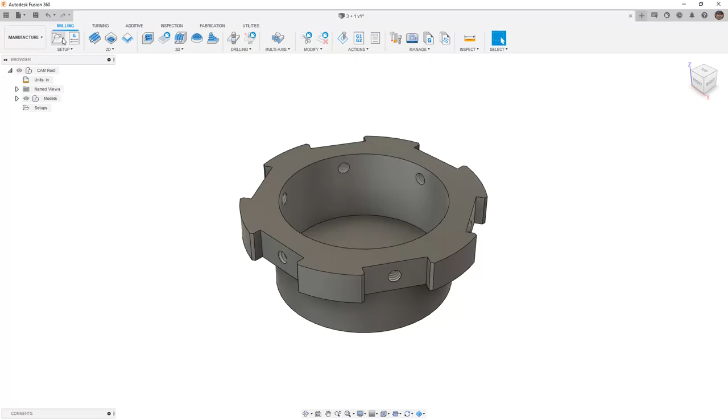For this part, we want to expand our models and expand the bodies folder, and note that we have a stock body. So for our stock, we're going to set this to from solid and use our stock body. For the coordinate system, it's important to understand whenever we're adding a fourth axis or an A-axis to a machine, this is going to be rotating about X. If you have a different setup or a different orientation on your machine, then you need to make sure that it's set up based on that. But for our example, we're going to assume that our A-axis is rotating about X.

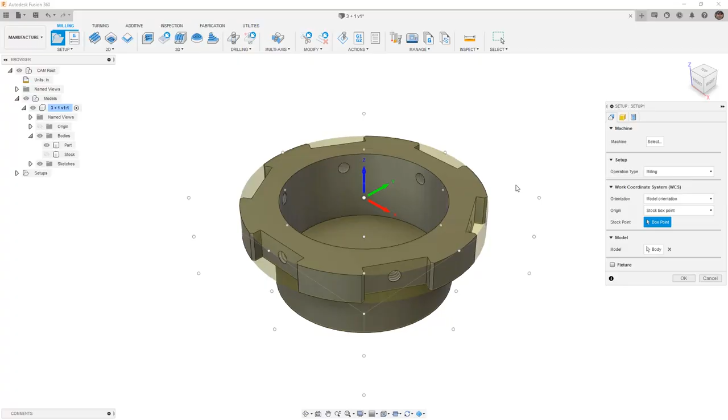So in this case, whether it's on the left side or the right side of the table will determine whether or not X is pointing away from the part or into the part. For our example, we're going to assume that X is pointing away from the part in this orientation, as if the fourth axis is mounted on the left side of our table as we're looking at the machine. From here, I need to make sure that my Z and my X are in the correct orientation. So right now, I need Z to be pointing opposite of X.

I'm going to do this by holding down my left mouse button over X, and then I'm going to flip my Z axis. Once again, I need to make sure that X is pointing the right direction. So for X, I'm going to select the default Z axis, and then I need to make sure it's in the correct orientation as well. So this is going to be at the center of my part at the far right-hand side, again based on the orientation that I'm assuming.

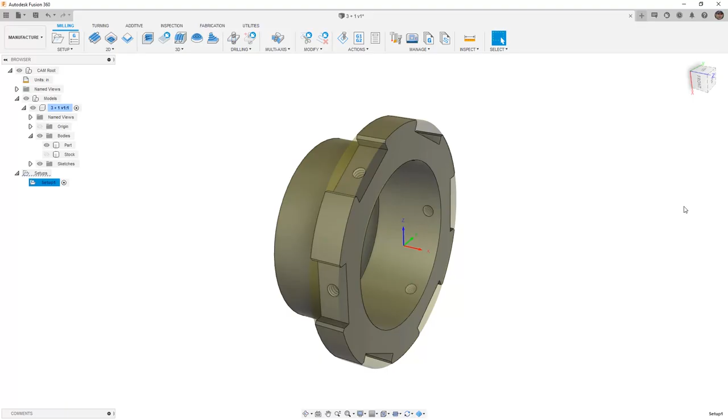From here in my post-process section, I'm going to add a comment of 3 plus 1, and I'm going to set my WCS offset to 1, which represents G54 on my machine. I'm going to say OK, and now that I have my coordinate system set up, I can begin programming. When we're taking a look at 3 plus 1 programming, what we're doing is we're rotating the part a specific amount, and then we're using our traditional 2D or 3D toolpaths. So for this example, we're going to start by using a 2D pocket.

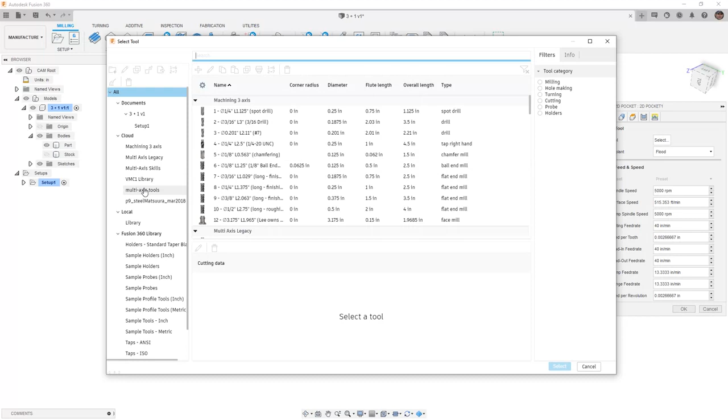Typically, when you start a 2D pocket, you first select a tool. We're going to go into our multi-axis tools and select tool number 6, which is our 1/4 inch flat, and use it on aluminum roughing. Once we have our tool selected, we generally would come in and begin selecting some geometry. You'll notice that when I try to select a chain, it's going to be based on the current tool axis, which is positive Z. So I need to start by setting my tool orientation relative to this face.

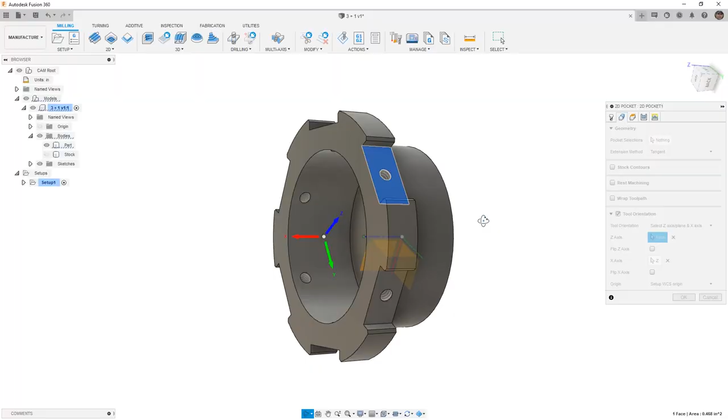So I'm going to select the face for Z, but note that X is not in the correct orientation. It's based on our setup WCS in terms of its location, but X really needs to be pointing away based on the default coordinate system. So you see here, what we're going to be sending the controller is going to be a rotation about A. It's going to give it an A-axis degree rotation, which means that when I'm setting up my tool orientation, I must represent the movement of my coordinate system based on that rotation at the center of my part.

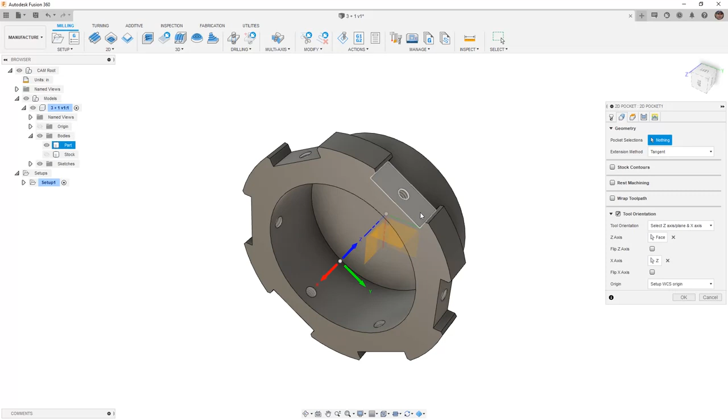Now that I have that selected, I can come back and select the face that I want to machine. I'm going to assume that this is not only a roughing but also a finishing operation, so I'm going to not leave any stock behind, and I'll say OK to create my toolpath. Whenever we're dealing with these 3 plus 1 or this multi-axis positioning, what we really want to make sure we understand is that process of setting up the tool orientation.

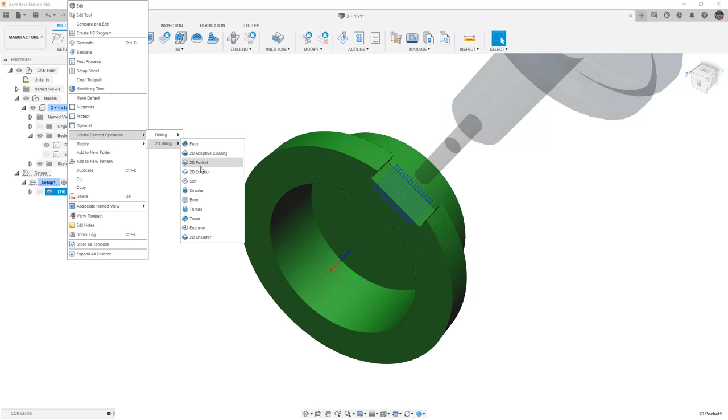Because we've already done that, I can right-click on my 2D pocket and I can create a derived operation for something else that I need to do. For example, a 2D contour. From here, I need to select an appropriate tool. For us, it's going to be our tool number 11, chamfer mill. And then I want to select my geometry. Now, by default, when I derived it, it automatically brought in those chains, but note that the coordinate system for my tool is automatically set up.

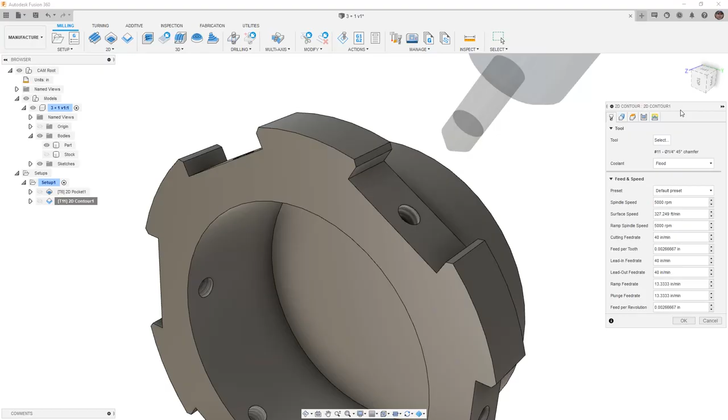I'm going to select the lower edge of these chamfers, and then I'm going to go to my passes and note that I have a chamfer option. I'm going to leave it at 0 and say OK, and allow it to cut those chamfers. Now, since I selected a chamfer mill, it gave me those additional options in the 2D contour. I could also use a 2D chamfer mill operation. Either would be just fine, but in this case, a 2D contour is fine because there's really no other geometry I'm worried about colliding with. So I'm going to just simply use the 2D contour with that chamfer option.

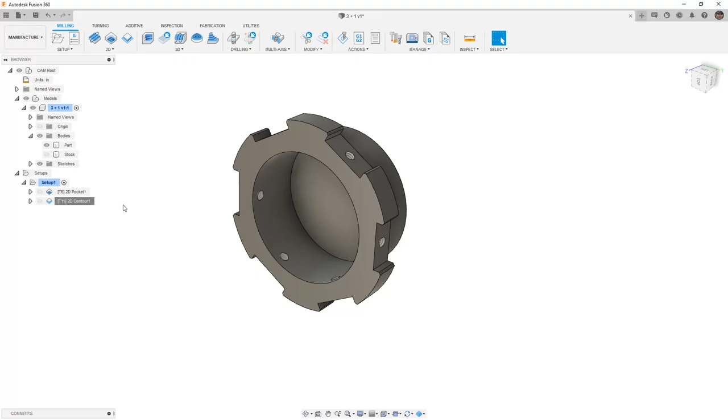I am going to add a small amount of tip offset, allowing the tool to come down just a little bit farther to make sure that the end of the tool is slightly below that edge. So this is a quick orientation in setting up our tool for a multi-axis position. Now, once again, the important considerations here are to understand the location of the coordinate system and its orientation. We need to make sure that with this fourth or A axis that we're rotating about X.

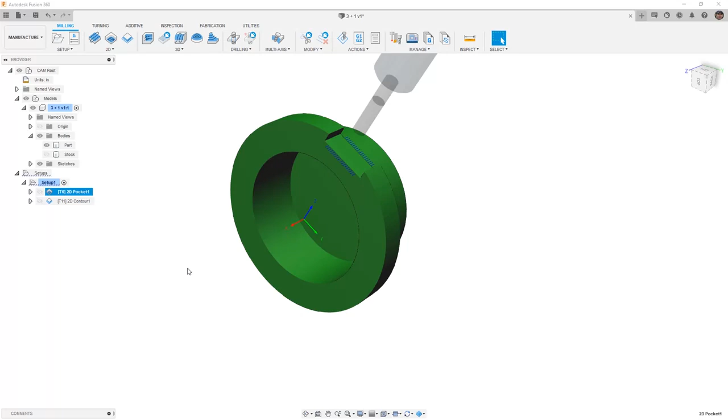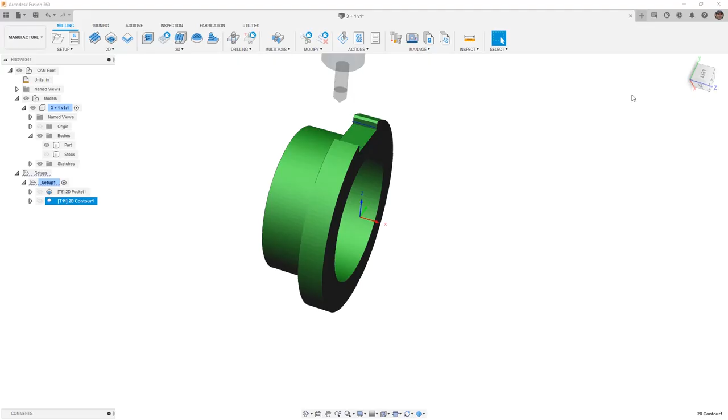The orientation of X on your table is going to be based on the position of this fourth axis as it's added. So in my case, again, I'm assuming that it's on the left side of me as I'm looking at the machine. So X plus is pointing to the right. This is extremely important that we understand that coordinate system setup, as well as the fact that our tool orientation must be represented in that coordinate system shift. We're only rotating about X. We are not changing Y. It has to be in the same orientation because that's what's going to get sent to the controller. Once we're done setting up this first 2D pocket and 2D contour, let's go ahead and save the design so we can move on to the next step.